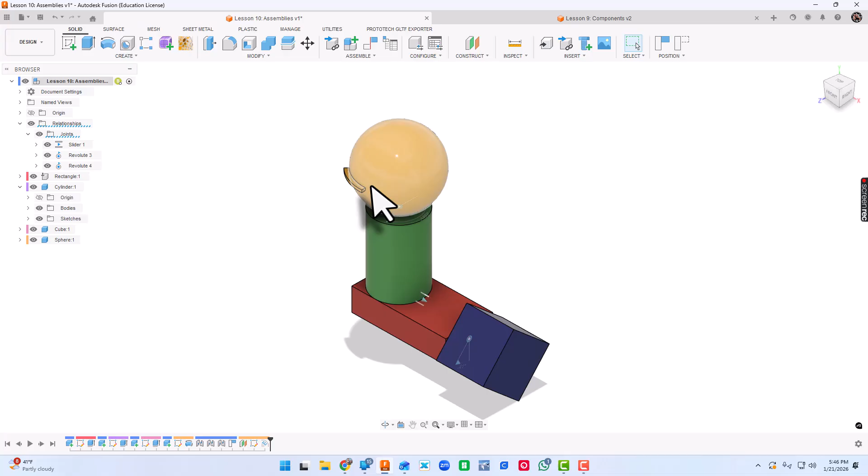In our last video, we created these components. In this video, we're going to take all those components and put them together in an assembly. Here's kind of what it's going to look like: we're going to be able to make joints spin, make joints slide, make joints spin some more. Let's go ahead and get started.

Our first step is to open lesson 9 components, which is what we made in our previous video. We'll double click to open it. Now what we want to do is save as on this, because we're going to rename this and use the same file.

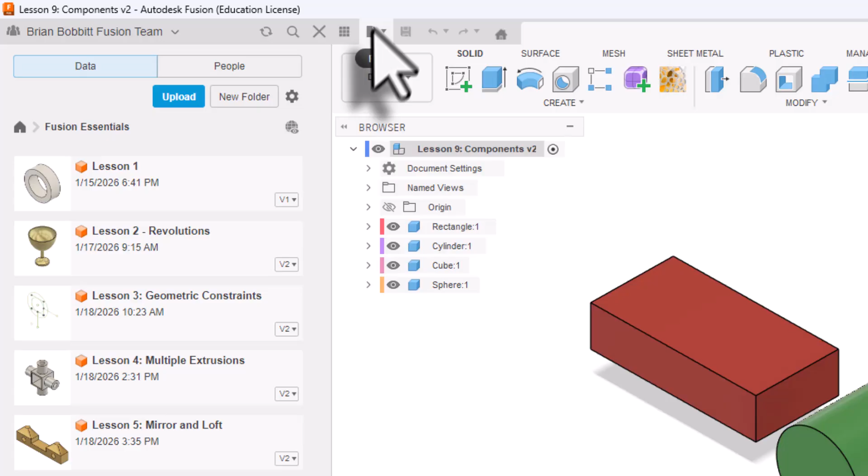We'll go up to the top where you see that little icon that looks like a piece of paper. We're going to click it and choose Save As. Very important to save as. We're going to rename it to lesson 10 assemblies, like that. Make sure we're in the Fusion Essentials folder and click save.

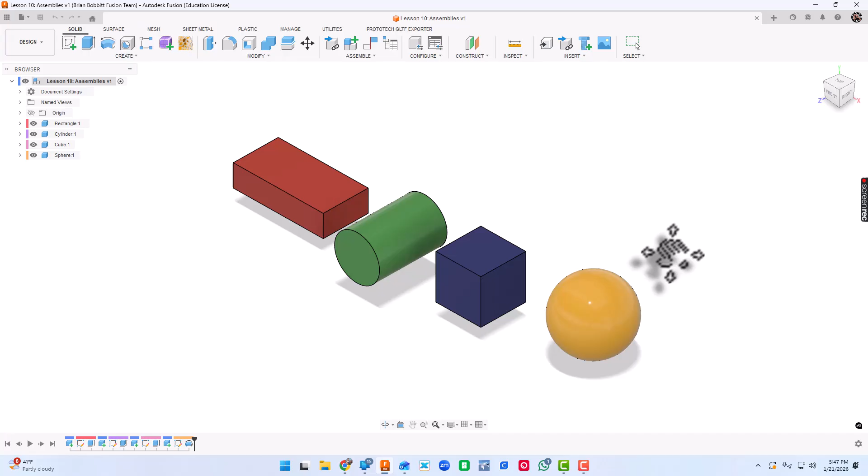We're going to toggle the data panel to maximize our screen. Now the first thing we should probably do, and I know in our last video we ungrounded this component, is reground it.

We're going to go over to the left side in our browser area, right click on rectangle, and choose Ground to Parent. Now all these other ones will move, and this one will not.

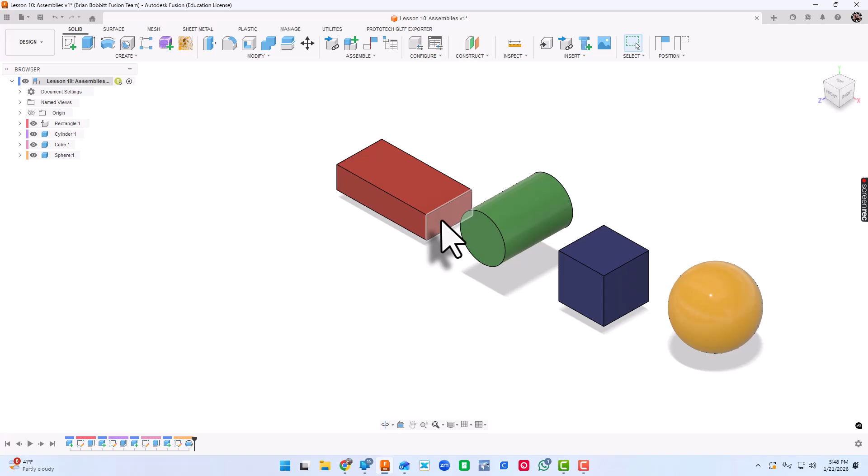So now we're going to use what are called joints, under the Assemble tab. We'll go up and choose Joint. You'll notice there's a J - that's a shortcut key. So Joint, and we've got a few things we can do.

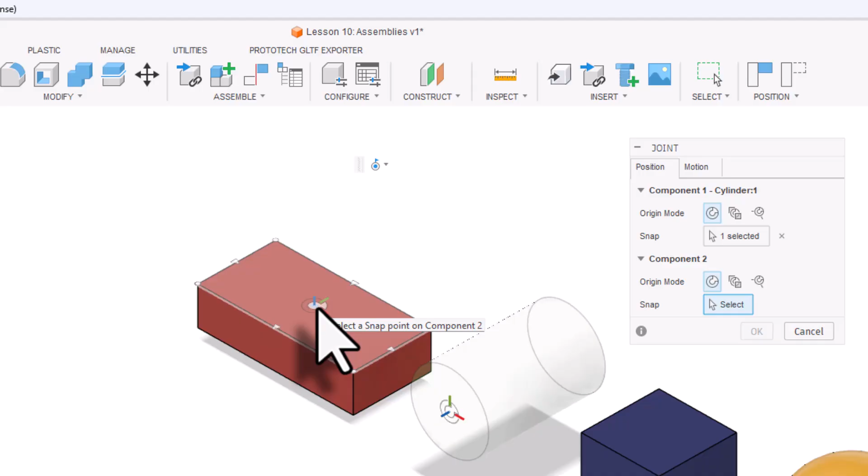I'm going to click the center of the face of the cylinder. I'm going to click there. I'm going to come over to the rectangle and click right in the center - I call these little pancakes, I think they're called glyphs. We'll click in there. All right, now we're going to go to motion.

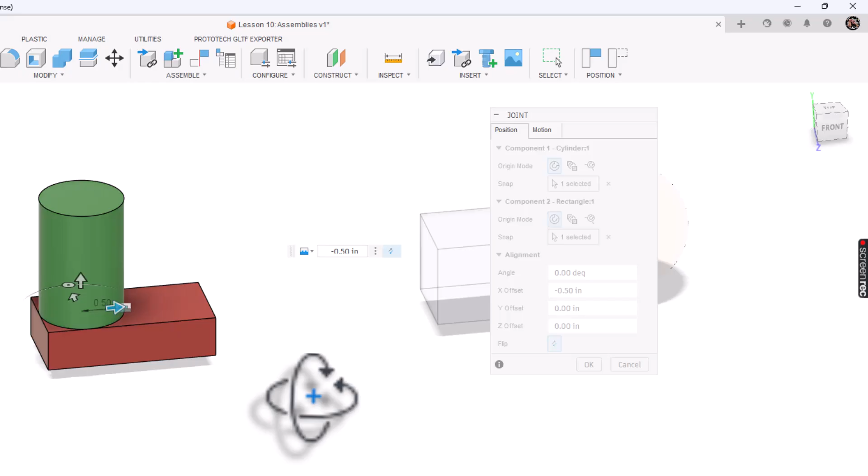By default, it'll always say rigid - that's when we first start. Then Fusion will remember your last joint and ask if you want to use that again. And in our position, let's slide that back till it's even with the edge. If we need to, we can use our view cube and say, alright, there's our front. That looks pretty good, that's where we want it to be. I'm going to choose Home now, just to get us back and zoom in.

That's good, we have it, but for our motion we want to choose and make it a slider. And you're like, well, that's moving up and down - and you're right, it is. But if we look over here on the slide, we can change that. We can say, let's look at the X, and let's take a look at the Y. Alright, we want to go with the X. Now you notice it's kind of sliding off of there.

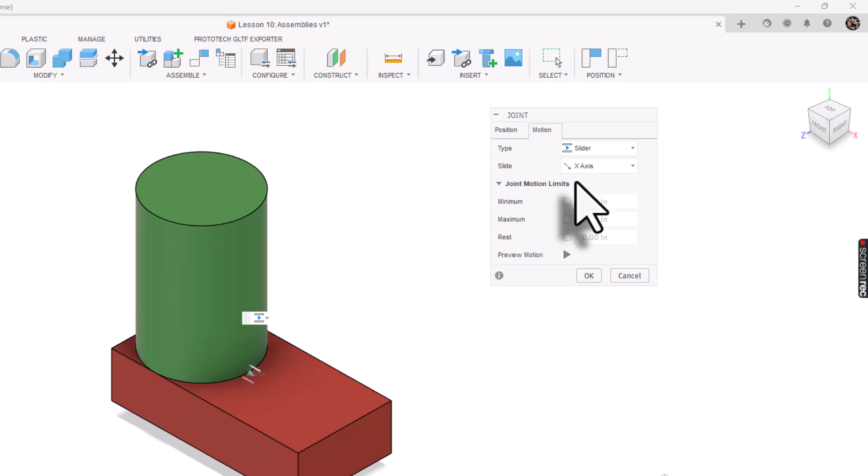So we want to set some limits. We're going to click the minimum, the maximum, and the rest. We're going to do all of that. Now what I'm going to do is rotate it to where I can see the front pretty good.

And now I'm going to drag these arrows, and say alright, let's make this go out to here. And let's preview it - press play. That looks good. Now by resting it, it's at 1 inch. So watch when we click OK.

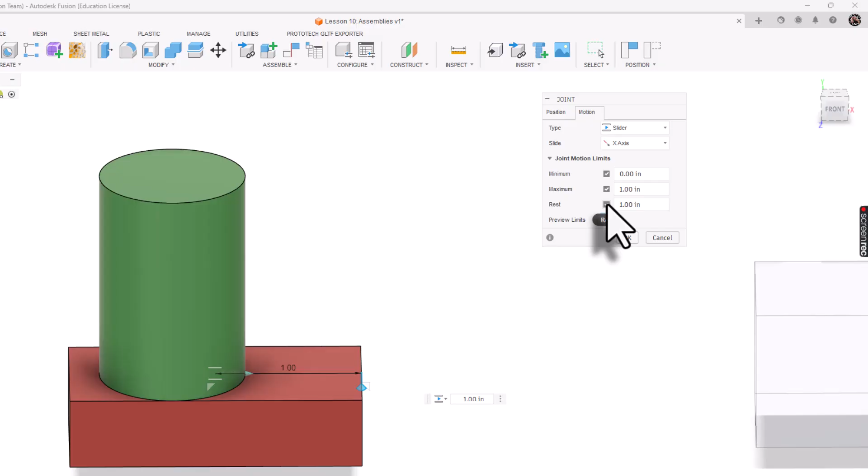It's going to rest there. If I drag it over and let go, it's going to stay there, because this is really where it wants to stay - that's its resting position. So if I drag it over here and let it go, that's what it's going to do, and that's okay.

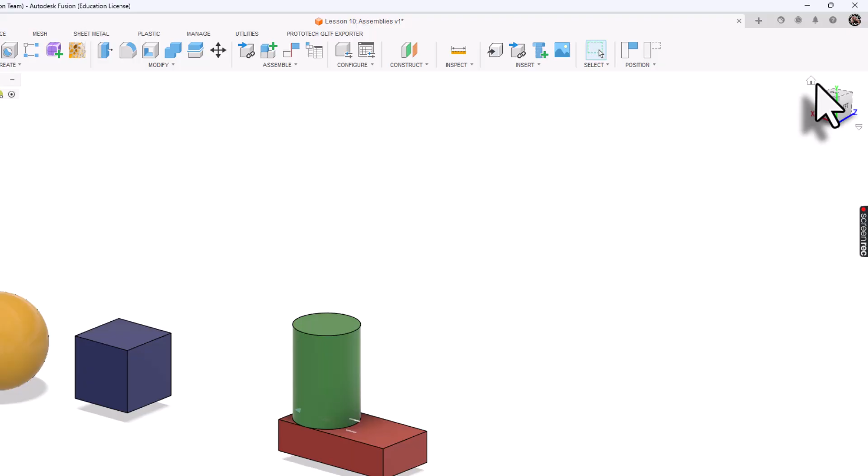We're okay with that. Alright, we're going to rotate it now. Let's hit the Home button because this thing's looking a little crazy right now. I'm going to take the blue cube and attach it to the other side of that rectangle.

So here's how that works. We're going to go up to Assemble, say Joint, and I'm going to click the center of the cube - any side, it really doesn't matter. And I'm going to click the center of the rectangle on the end.

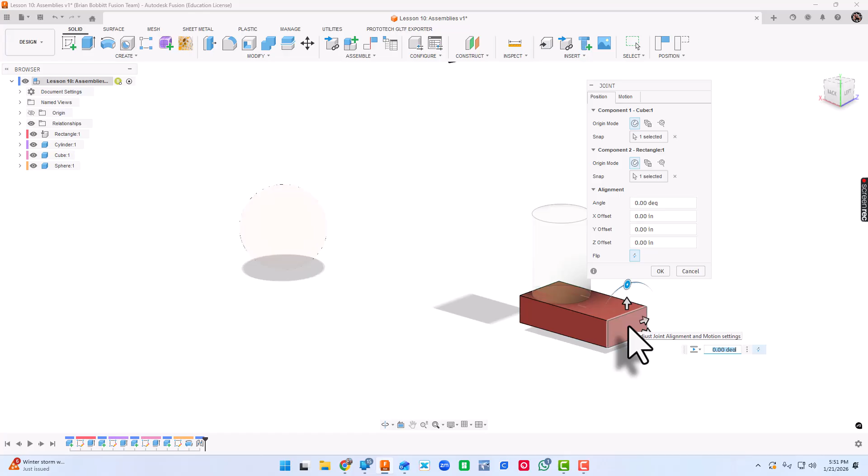Now it's still set to slide, right? So that is actually good placement, our position is good. But for motion, we're going to change that to revolute, so now it's just going to spin. We can click OK. Now I want to point out, though, I don't have to just play it - I can grab this with my mouse and just spin it.

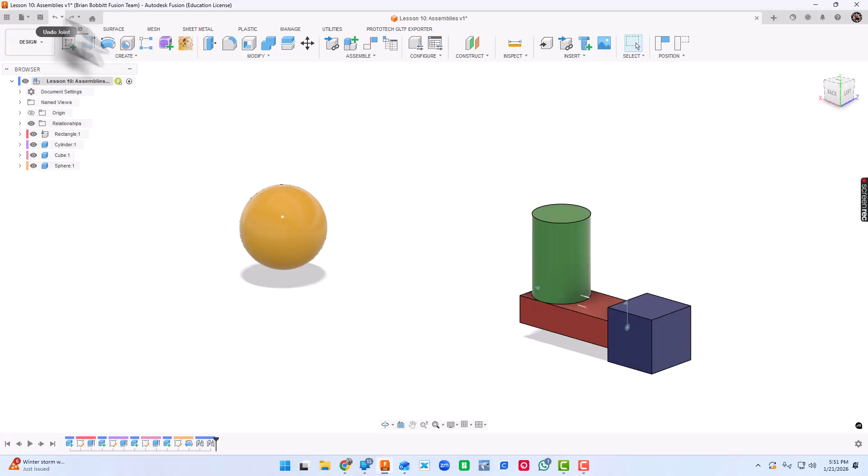I can do the same with the slider now. Right, I'm going to undo that just to get them back to their home position. There are other ways to do that, but that's probably the easiest for now.

We're going to go back to Assemble and say Joint. And what I want to do is put this ball on top of the cylinder. So there's a lot of different places you can grab a sphere at.

If I click, you can kind of see it's putting a little pancake inside. But I kind of want it on one of these edges. So I'm going to click there, and I'm going to click on top of the cylinder. So there it is.

All right, and that we're going to actually leave as a revolute. We'll click OK. So this is good, but now I don't know if you noticed, but that's really, really hard to see. All right, we can see that it's there because we can see the revolutes moving. But I tell you what, let's make it a little more obvious.

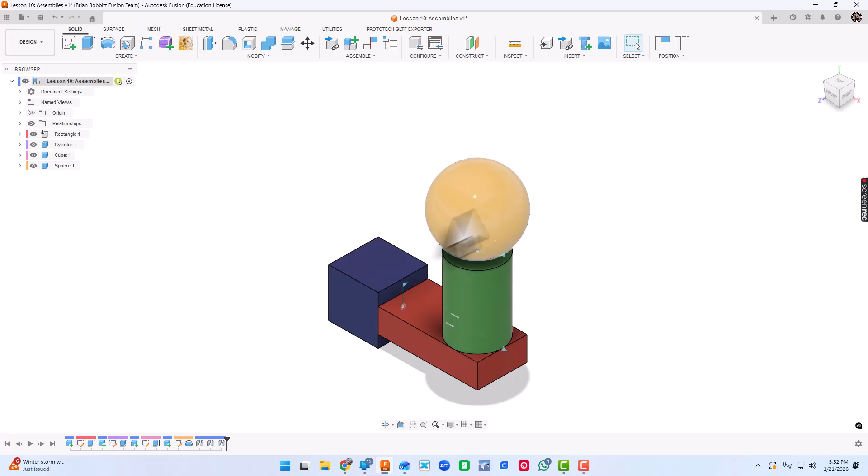So this kind of helps us get into our timeline too. What I want to do is just edit the sphere. You see how I clicked on it and it puts a squiggly line under it?

And I'm going to select just that object. Now I have the timeline for just the sphere. Let me undo that. Let me select the whole assembly. Watch the timeline, and you see everything.

I just need to make an edit to the sphere, so I'm going to go down here and select that. All right, so now we're just editing the sphere. I'm going to put some sort of indicator on this sphere that lets me know it's actually moving. Right now it's a perfect sphere, so I can't actually visually see that it's turning.

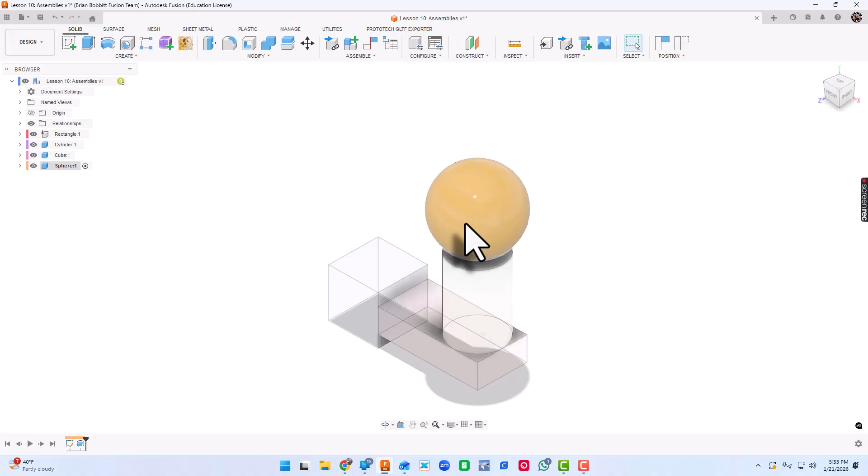So I'm going to go up to Construct, and I'm going to choose an offset plane. When this comes up, it's going to ask you to revert position or capture position. That actually has to do with something else that we're not going to cover in this series. So just click capture position for now.

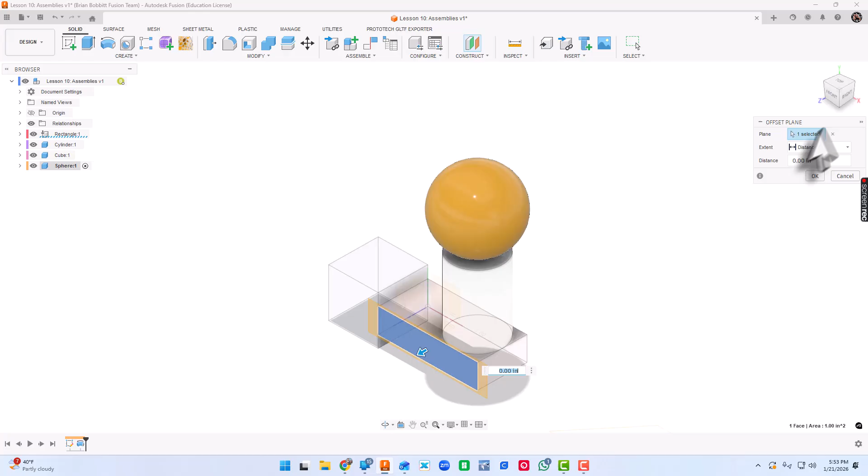I'm going to put a plane right here. I'll click it and notice that's the side of the rectangle. I'm going to go to the view cube and I'm going to say, give me the right side of that.

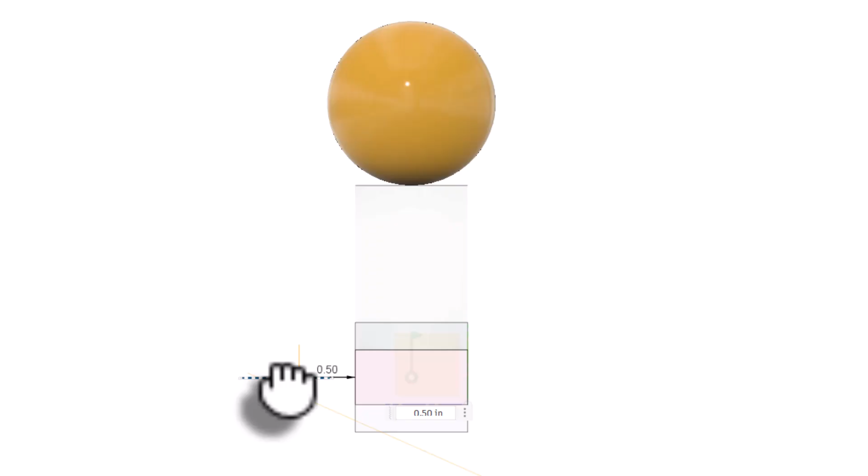What I'm wanting to do is move this plane out so that it's a little bit past the edge of the sphere. So it looks like, let's just go with 0.5. That's a nice number to play with. And we'll click OK.

And now I'm going to rotate it back. And I want to look at the front view. And I'm going to choose Sketch. And I'm going to click on that plane we just drew.

Now I know you're thinking, well, the plane's right here. Well, actually, that plane extends all over the screen here. Okay, let me rotate this so you can see. See what I mean? Let's use that view cube, go back to the front.

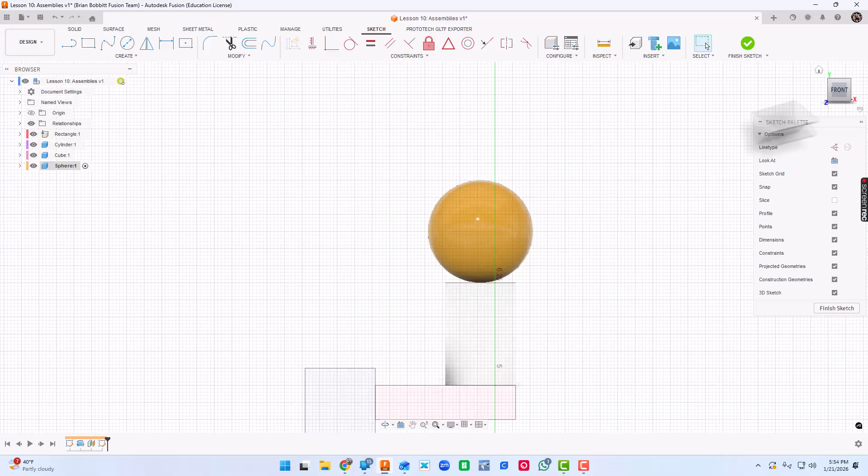What I'm going to do is just simple. I'm going to try to find the center-ish of the sphere. I'm just going to draw a rectangle. And the size of this rectangle is not a huge deal.

I'll use 0.1 there by 0.6. You can see my numbers. I'll click that. And now I'm going to click Finish Sketch.

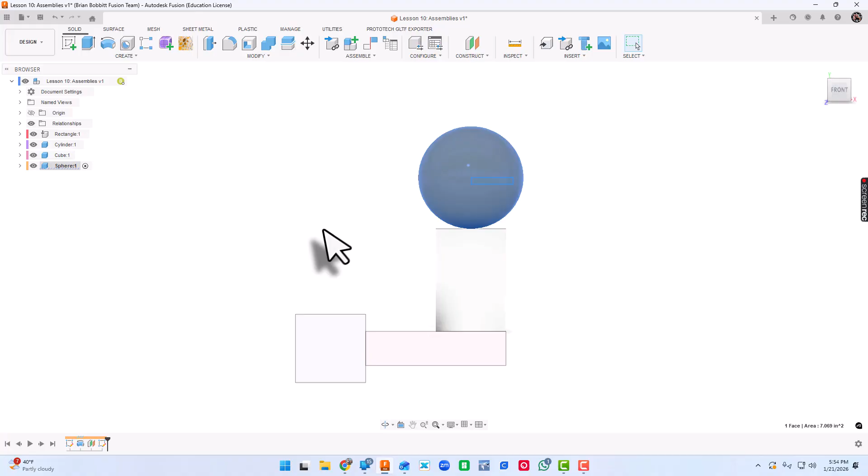This is going to be a little bit different. We're not extruding here. What we're going to do is we're going to go up to Create. And we're going to say Emboss. We're going to click that rectangle because that is our sketch profile. So we'll click the rectangle.

Now it's making an assumption for us on the face. On the face, it's assuming that we want it on that sphere, which is true. That's what we want. So we can let it be.

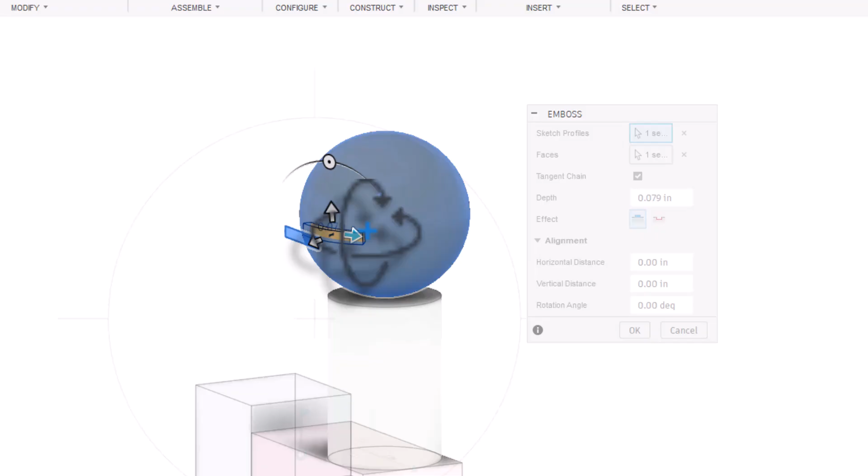Right? We do have one more choice we can make. We can say, I want it to be an emboss, or I want it to be a deboss. If we use deboss, it's simply just going to make a cut. Let's go with emboss. So right over here. And we'll just click OK.

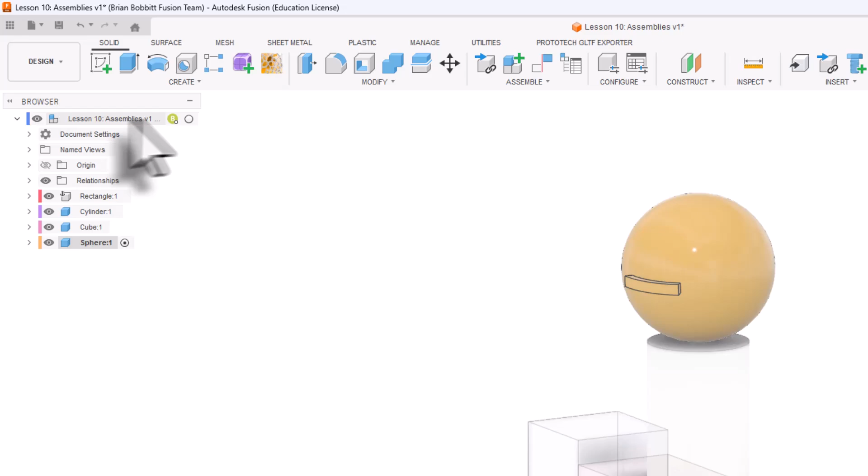So now you can see there's something there that when it does turn, we'll be able to see it. What I'm going to do is, instead of just being on sphere, I'm going to go up to the top, activate the whole thing. And now let's rotate that sphere. So now I can see visually that it is rotating.

We can rotate this around now. The cylinder is going to slide. The cube is going to turn. So we're actually in perfect shape.

What you'll do is you'll home that, and then you're going to call your teacher over, and you're going to demonstrate to the teacher the different movements you have here.